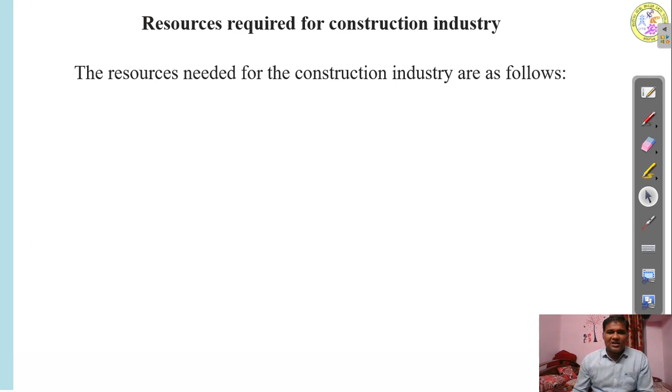Now I am going to discuss with you what are the resources that are required for construction industry, and the resources needed for the construction industry are as follows. These are the different resources.

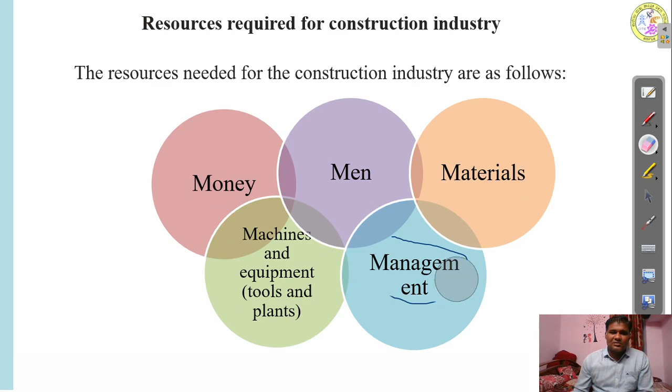Also the machines and equipment, this also plays a very important role in the construction projects. So these are the 5 important resources that are required for any construction projects or any construction industry.

Let us discuss in detail. The first one is money. Money is the first and foremost resource, where, as I told you, all the resources are dependent on this.

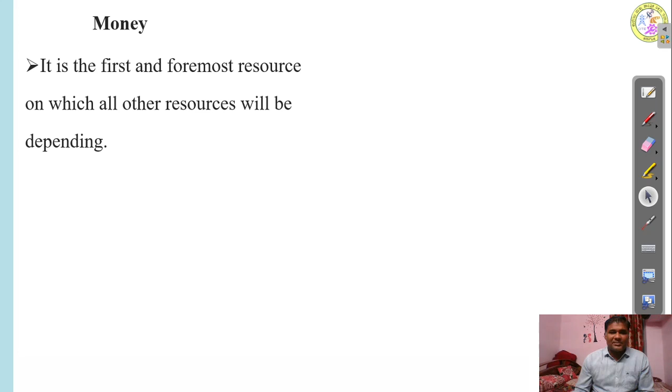This money is usually funded by the owner, but in the absence of owner, sometimes the contractor who is working in the project has to run the project with his own budget. Sometimes it happens like that. So this money plays a very important role in any construction project.

Sufficient financial arrangements should be made before starting the project.

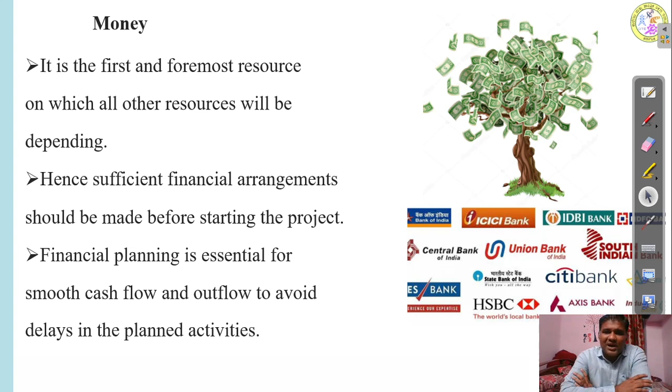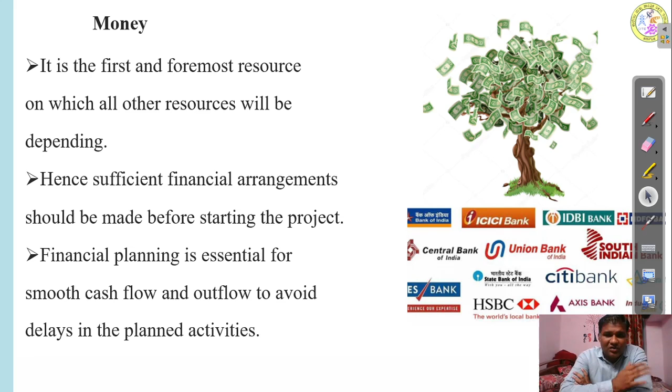So for example, here I am going to show you an Excel sheet of a project, a hotel project in Bangalore.

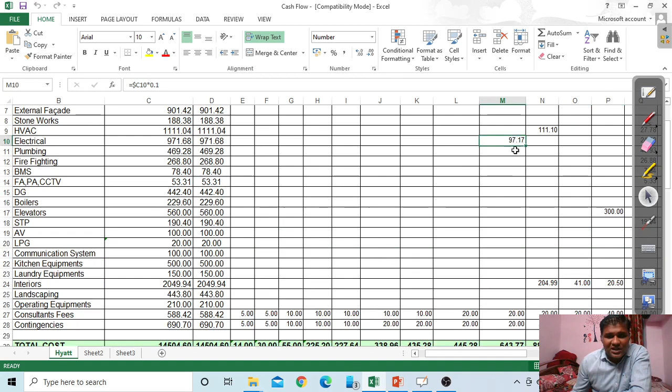So like that, I am going to propose the amount which is required for each activity and also for each specific month. This is called the budget forecast for the project.

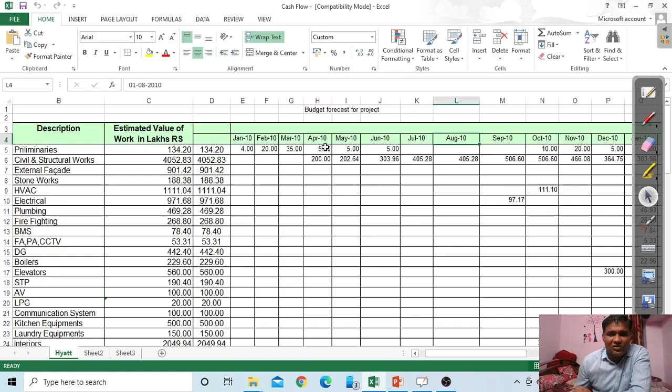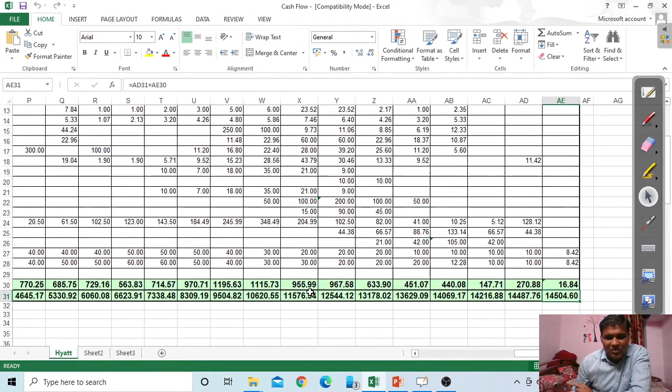See here, the total project value is 145 crore, and after allotting the amount for each and every month and activity, the total should match this - it is 145 crore rupees for the project.

So this is called budget forecasting, or the budget forecasting, and also the cash flow.

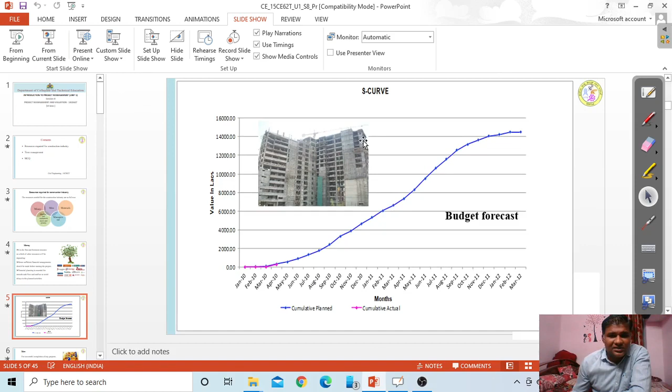Always you can see for any construction project the finance will follow an S curve.

So the investment or the budget starts at a lower level when you are putting up the structure, and as you finish, the project requirement becomes more, because there are so many agencies that are going to enter into it.

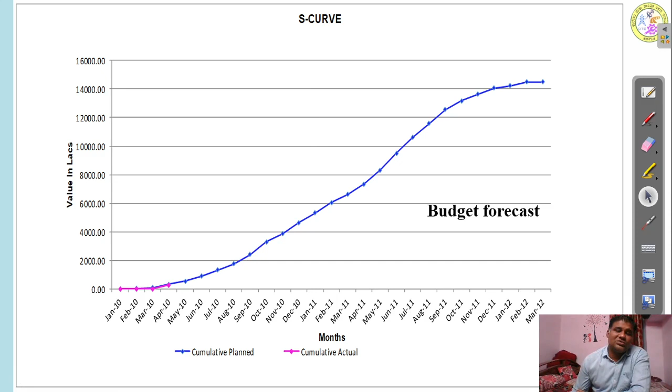So this is called as - what I'm explaining - this was the project.

This project consisted of 145 crores, and for constructing it we are spending 40 crores for only civil and structural works.

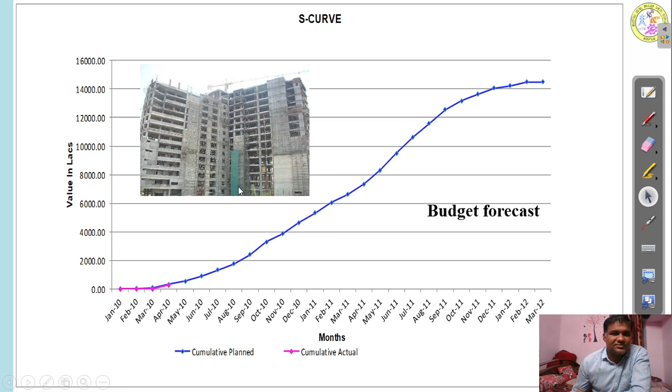So next, men - the second most important resource. Management always says the most important resource for any industry, specifically for a construction organization, is men. Men means the workers - skilled and unskilled labor, barbenders, shuttering people, and all those. This includes workers, and even the engineers also count as men.

Handling them is very important, because we have seen so many industries in history - Mysore Paper Mills, Visvesvaraya Iron and Steel Limited, BSNL - lot of companies getting locked out for so many reasons, and this may also be a good reason: manpower resource. The manpower should work hard, work dedicated, and be committed to the job. Only then can the company and industry make profit.

So for successful completion of any project, both skilled and unskilled manpower is required. When you say unskilled labor, what comes to mind is that they are not well educated, they are used for unskilled works. So here you can see the persons are excavating the soil for the casting of foundations.

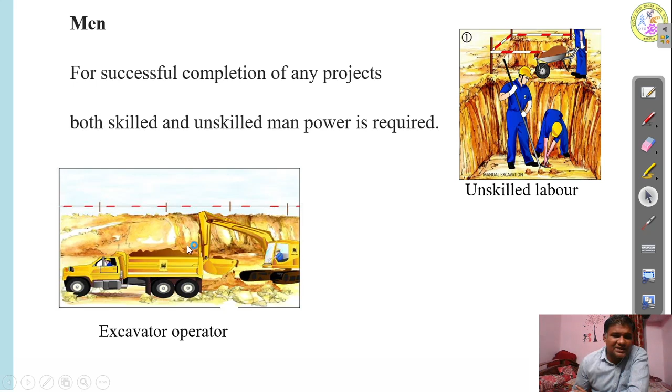This is unskilled labor, and here an excavator operator is lifting the earth to the tipper - this is also a manpower resource. And here the person is spraying anti-termite into the ground, avoiding termites catching above ground level.

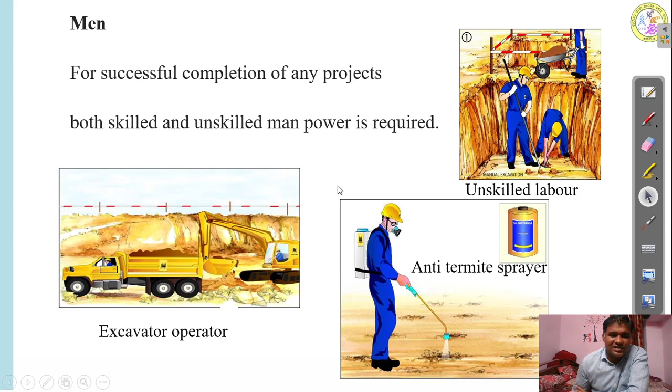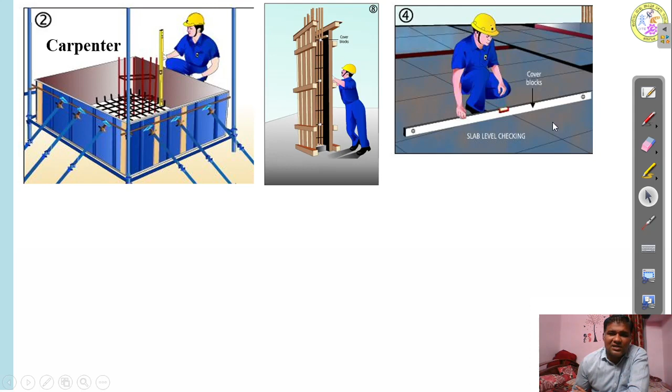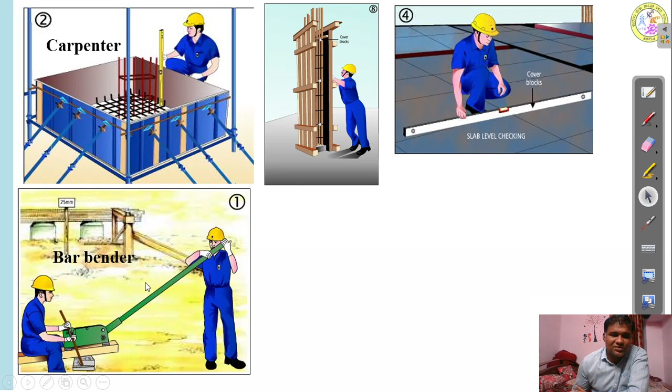Here a carpenter is setting up footing sides for centering of footing. Here the carpenter is putting the column box. Here he is checking the level of the shuttered slabs. The barbender - very important - is bending the reinforcement, making stirrups and concreting during progress of concrete.

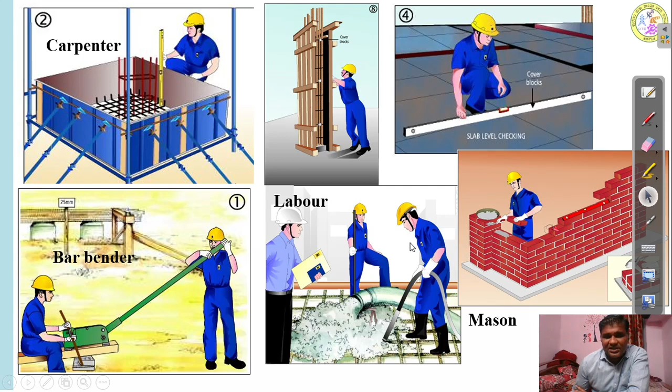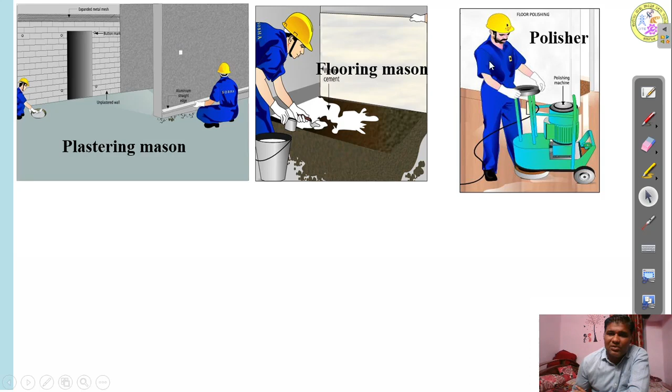So like that, what I've shown are all manpower. They enter the project at different stages. In the initial stages you will require shuttering carpenters, barbenders, and masons. After completing the structure, masonry masons will be required, then plastering, flooring, and painting agencies - different agencies, different men will be introduced into the site.

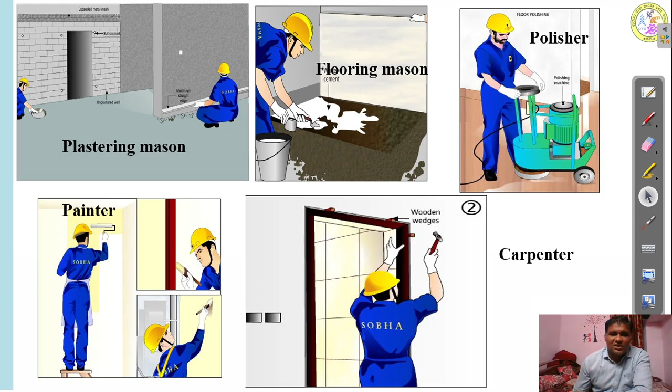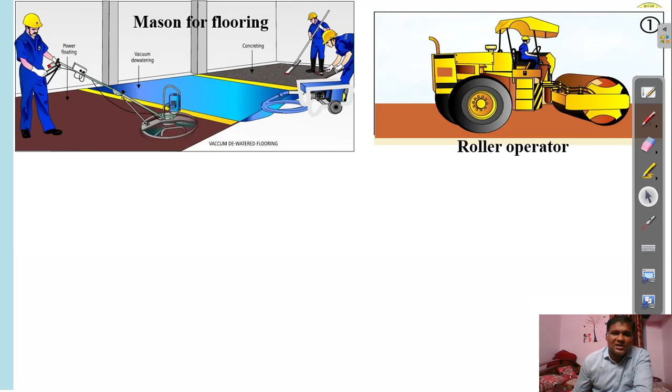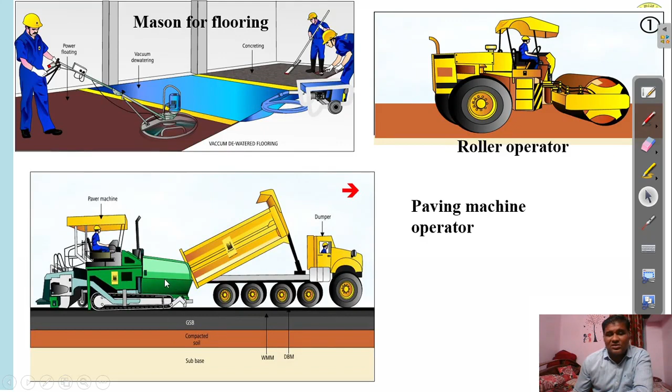Here you can see this is called vacuum dewatered flooring for parking and driveways. Here the roller is operating for compacting the earth, and a paving machine for constructing bituminous roads. So these are the different workers seen used as resources. Now men is not only limited to those workers - even the site team and consultant team also come under the men's resources.

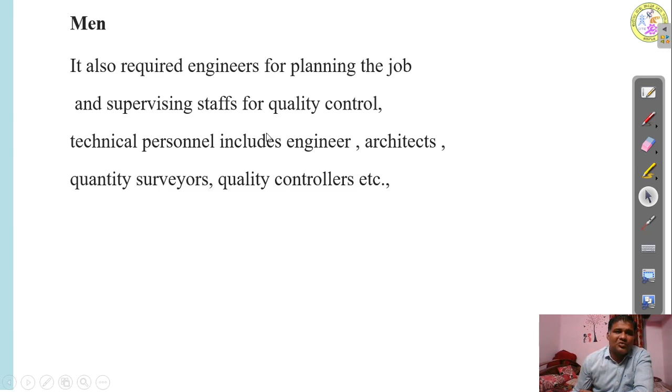For example, the supervisors, the quality control engineers, the planning engineers, the quantity surveyors. The surveyor's main job is first he will come onto the ground and he is going to hold the footing layout.

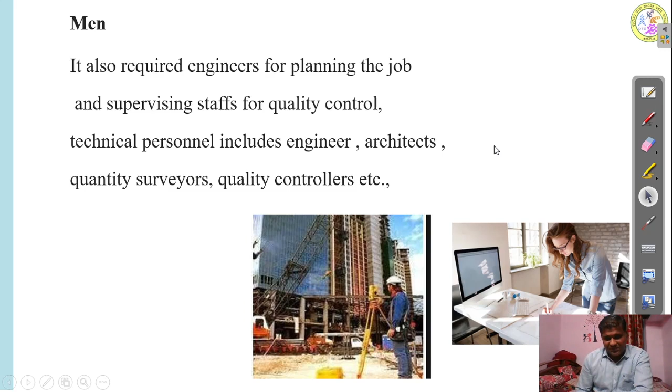And then quality control engineer - any material that is coming into the site has to be tested, and proper records has to be maintained.

Because before handing over, after everything is complete, after the total building is finished, when you are going for a handover, these reports - there will be an auditing done, and these reports will be very important for commissioning of the project. Because there are so many issues, problems have been raised up in Bangalore.

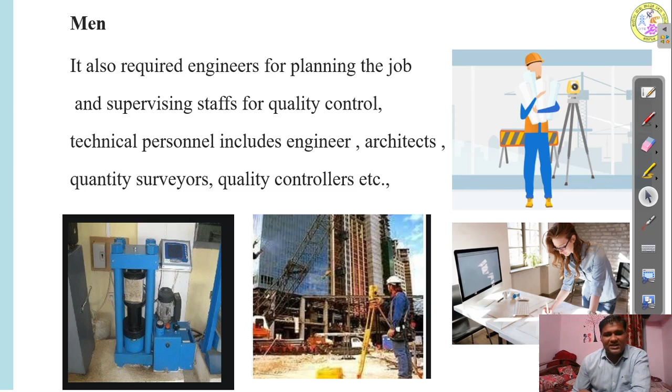So next is materials. Materials are the physical resources which provide physical shape to the designed project. For any construction work, large quantities of different materials are required, and they should be made available in time.

So now we are going to prepare a schedule. Like I showed you the cash flow, in the same manner, materials schedule will also be created. How much aggregates are required for this month? What are the different materials? What material is needed for HVAC, for plumbing, what are the different materials required?

In the schedule, every day or every month I am going to put the requirement of materials and the amount, because material schedule is created so that material has to be on site in advance, because every day there will be 250-300 people coming to the site, and you have to as an engineer show them the work. If there is no material being planned, then there will be idling of labors, which is a loss to the organization.

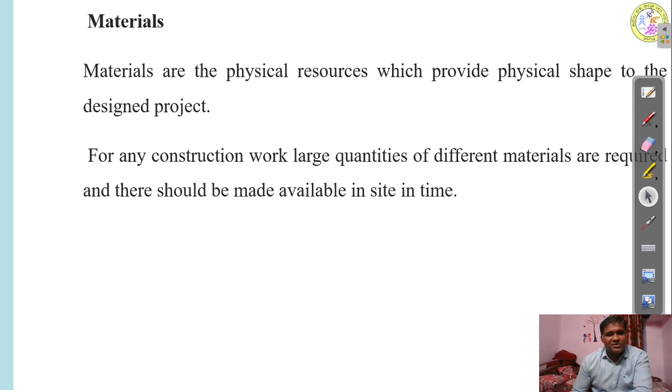So managing of materials is also very important. Usually the purchase manager will be the head of this material division. All materials should be supplied according to the required specifications. Materials such as stones, bricks, steel, cement, aggregates fall in this category.

So whatever materials are being supplied, it has to match with your specifications in the bill of quantities that was prepared. Say for example, if you are going for steel, it might be Fe 500 steel with a certain yield strength - you have to carefully observe that Fe 500 steel is on the site. Sometimes what happens is people will regularly be buying Fe 415 instead, and also the diameter of the bars may differ.

When you are going to purchase concrete from a ready mix plant, about the strength, you have to check the batching sheet at the site whether the ordered grade of concrete and the supplied grade of concrete match, because once the material is put into the structure, it is very impossible to remove it. A lot of manpower and money will be wasted if you are going for demolition. That's why while putting concrete, you have to be very careful about the grades of concrete.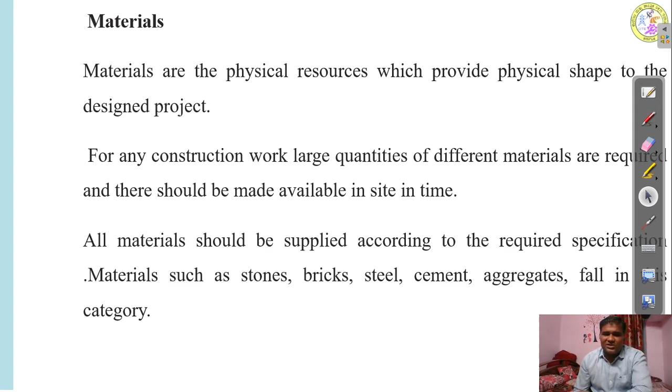So in this manner, the managing of material is very much important. And the basic materials are cement, natural sand and manufactured sand.

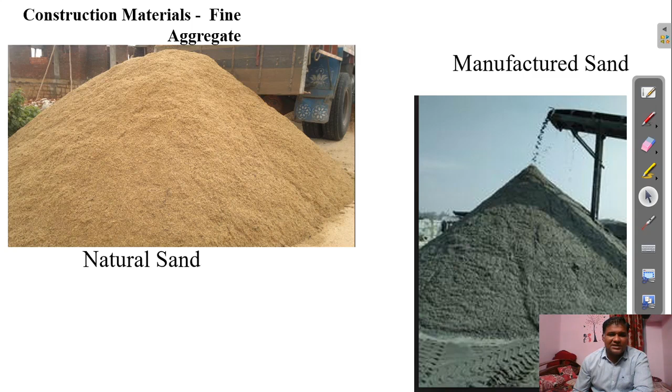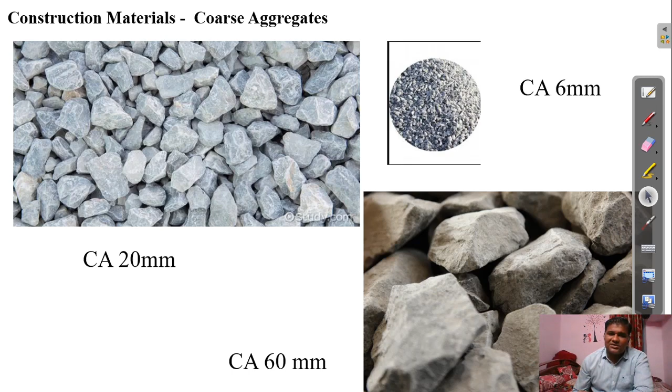Today we are in a very very scarce situation of natural fine aggregate, and it has been completely replaced with manufactured sand. Coarse aggregates for production of concrete come in different sizes - starting with 60mm for railways, 40mm for plain cement concrete and bed concrete, and 20mm and 10mm for slabs. Nowadays there is no concrete being produced without it, because if you are going to purchase concrete from ready mix plants, they are going to supply it this way.

It may take 20-25 minutes to reach your site, because the setting time of concrete is 30 minutes. So in order to delay the setting time, I am going to put admixtures like super plasticizer and retarder, for increasing the setting time of the concrete.

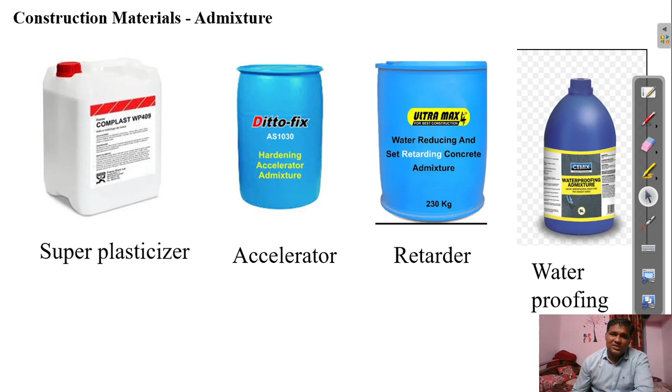Also, if you are going to construct high-rise structures, you want your concrete to be pumped through a pipeline, so it has to be flowable like a liquid, and at the same time you require higher strength. The slump should be high, almost a collapsible slump, and at the same time strength should be maintained. In that situation, these materials are going to induce those properties very well.

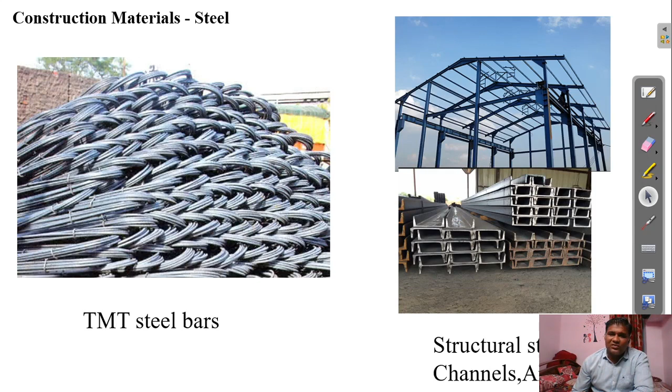Steel: there are two types, TMT steel bars for reinforcement concrete, and structural steel for when you're going for industrial structures or any sheet roofing.

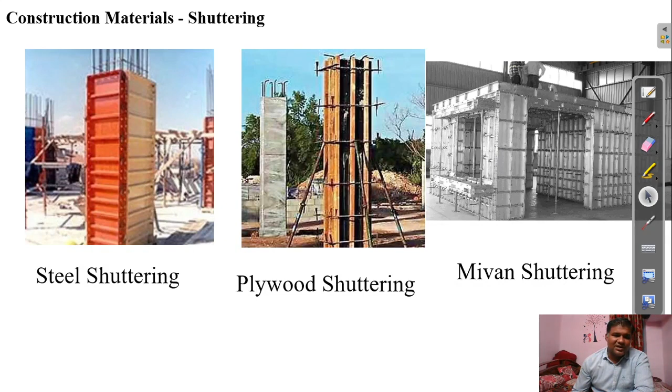Shuttering, plywood shuttering. Earlier days we were using steel shuttering, but it has been replaced with plywood. Now there is a new kind of shuttering called Mivan shuttering, which is being used.

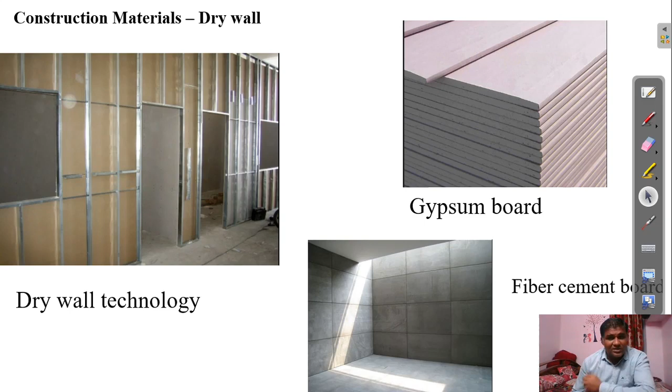And if you are not going for walls for partitions, there is one modern method of construction called drywall technology, where you drive the aluminum framework from slab to the floor, then fix it up with boards. The boards may be of different types: fiber boards, gypsum boards, and acoustic materials for absorbing sound if it is being used in cinema theaters or shopping malls.

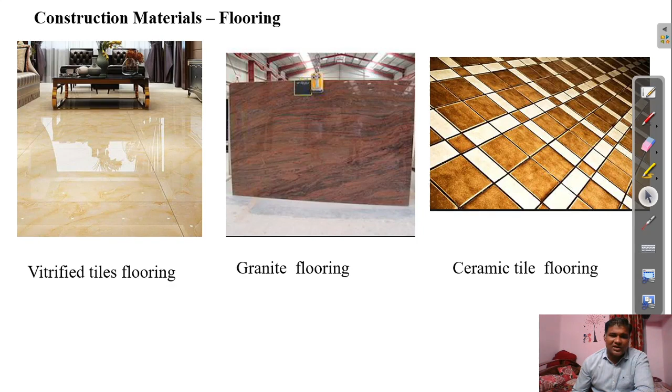Wall panels, flooring material variations are very very large: vitrified tile flooring, granite flooring, ceramic tile flooring, and construction materials like wooden flooring, polyvinyl flooring. So there are plenty of flooring materials also.

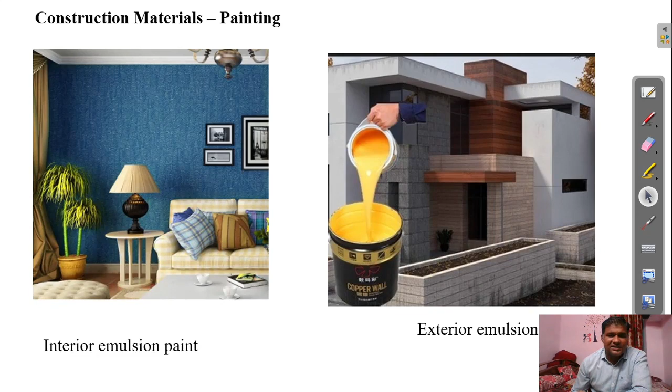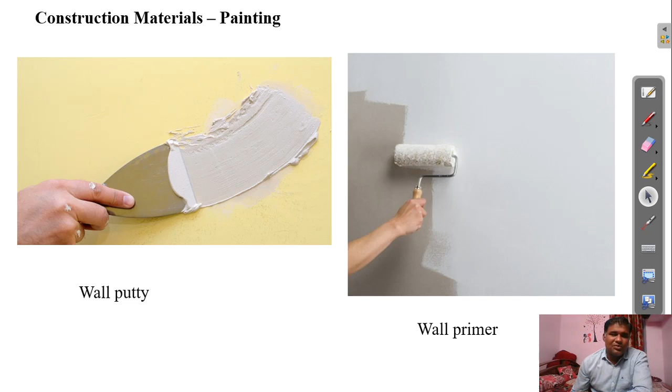Construction materials such as painting: interior emulsion paint and exterior emulsion paint, wall putty, wall primer. So when you're going for painting, first a coat of primer will be applied, then putty will be applied, and then paint is applied.

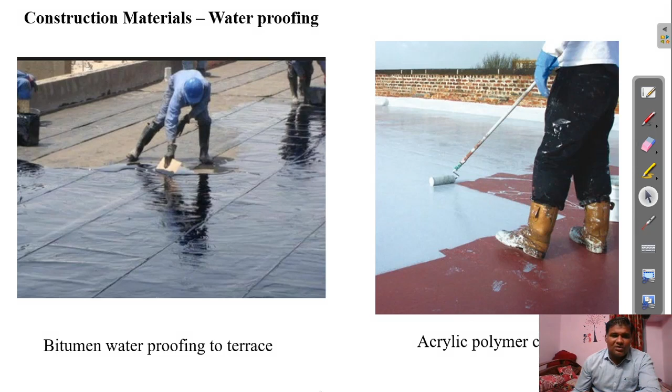Above this, one layer of concrete is put and finished. Again, one more layer of acrylic based emulsion is applied. So these modern materials are also required.

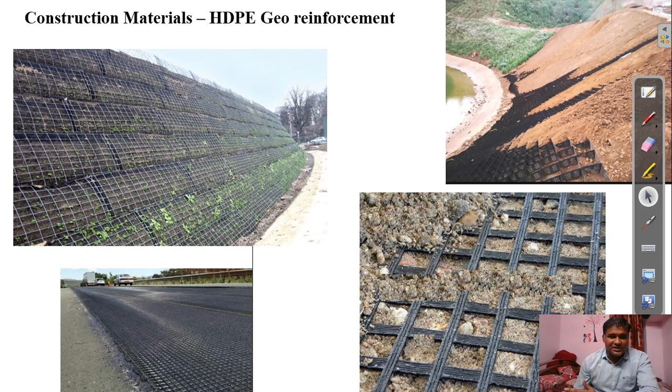These are the different materials that have to be used in the construction industry, which you have studied thoroughly in your third semester in construction technology. So I'm not going to stress more about the properties of materials and all, I just wanted to revise the materials being used in the construction industry.

Now, after men, materials and money, then comes the management of tools and plants. Tools and plants means majorly the equipments nowadays. It's an automation world where manpower has been strictly reduced, because of human errors.

The robotics and the machines are going to take the place of humans. So in the construction industry also, a lot of modern equipments have come to improve the progress of the project, and to ease the human effort.

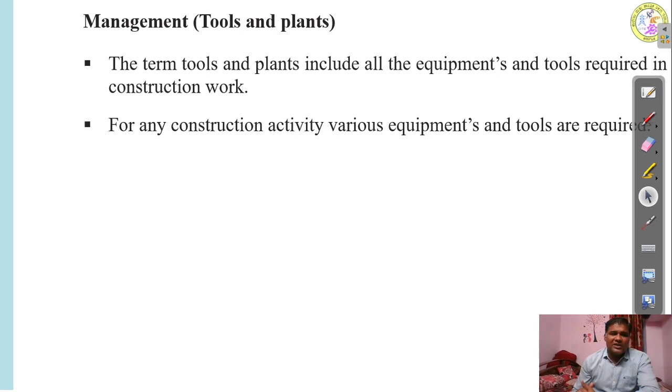So for any construction activity, various equipments and tools are required based on the activity, depending on the type and nature of the work, and which type of project—whether it is a road project, building project, or dam construction project. Based on that, you are going to have a set of equipments.

If you are going for buildings, high-rise structures or any kind of buildings, you need earthwork excavators at the initial stage of excavation. If you encounter any rock, then you go for blasting or compressors, rock drillers. And if you are going for superstructure, you need equipment for lifting concrete, pipeline and pumping setup.

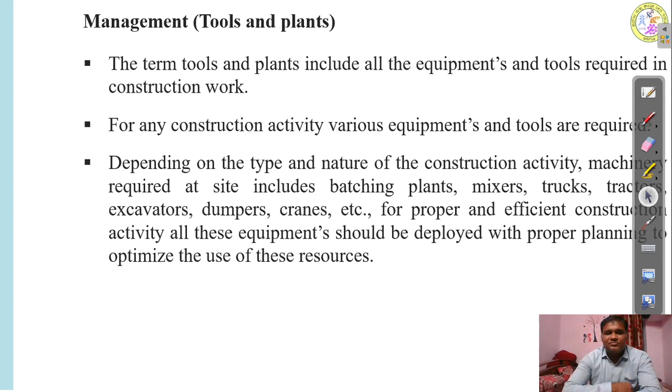These are the basic, and you also need a tower crane for lifting the materials. Coming to road projects, there is a different set of equipments required: graders, earthwork excavators, paving machines, and rollers. So let us have a look at the different equipments.

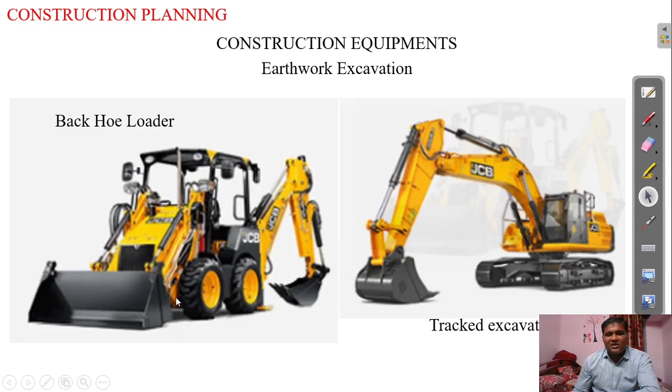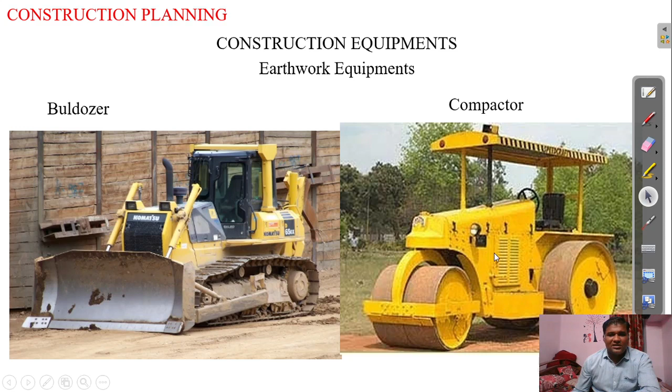Next is the bulldozer. Whenever there is construction of any project, first you have to remove the plants, so that will be done by this bulldozer. And then for increasing the density of the soil, you have to compact it. So this is the road roller, usually called as compactor.

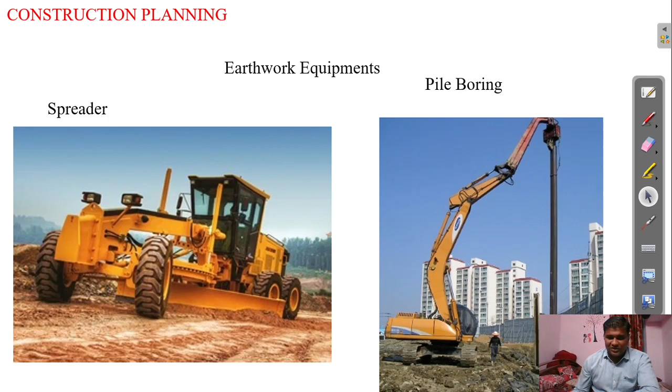When you're going to prepare an embankment, a lot of earth has to be spread, so for that purpose we use this spreader. And in the construction of bridges or high-rise skyscrapers, we go for pile foundation. Even for Bangalore Metro, for the piers construction we used pile foundation. So this is the pile boring machine that is used to dig the holes.

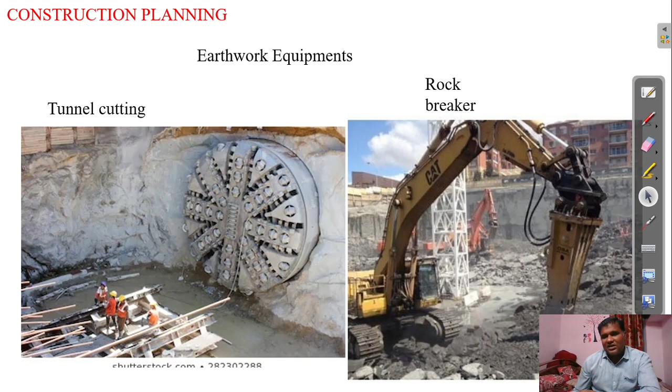If you go to the northeastern states of India, where hills have been cut to prepare tunnels, the tunnel cutting machine will be used. And if you encounter any rock as you go deeper, because for high skyscrapers you need 2 or 3 level basements for parking in metro cities, the depth of excavation will be more. So there, for breaking the rock, we use this machine.

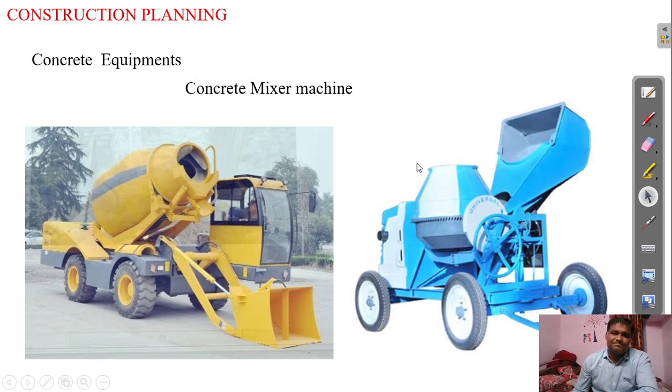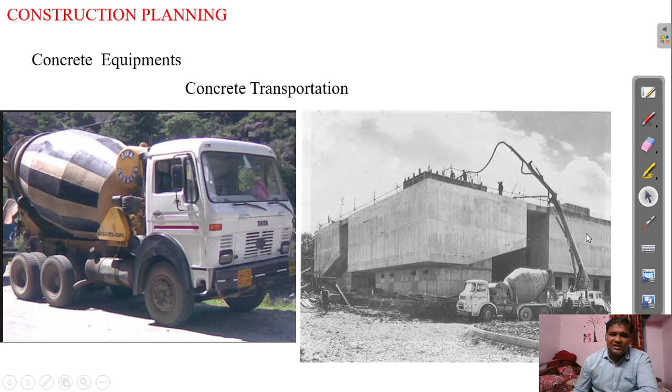And this is boom pressure concreting. When there is difficulty in reaching, in putting the pipeline, this boom pressure concreting will be done.

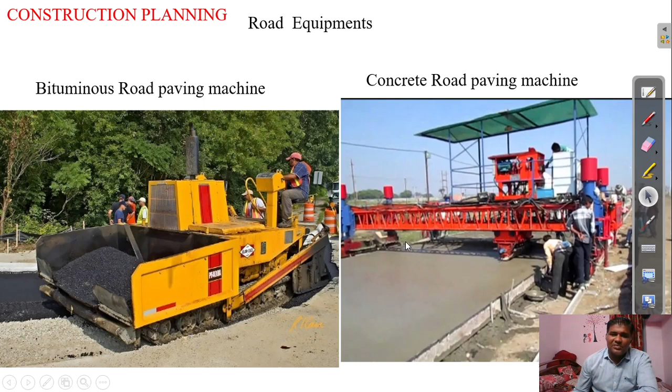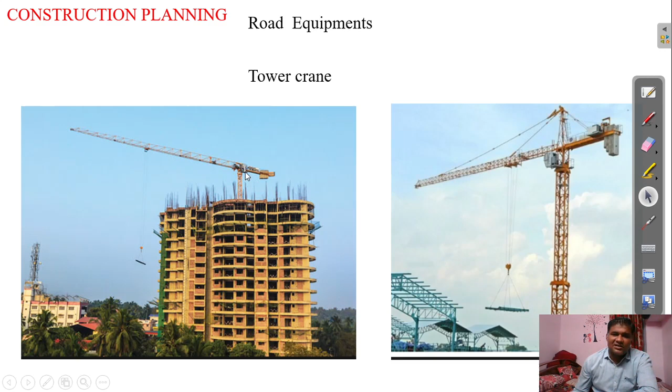And while constructing towers, this will help a lot. This is called the tower crane, for lifting any type of material. It may be steel or concrete or shuttering material or blocks. This tower crane will be used, and it can be extended as per the progress of the structure.

So these are the different machineries that have to be managed well, because their maintenance is required and their safety is also important. The machinery management is also a very important resource for the faster execution of projects, and its planning is also very important.

And finally, one more type of important resource is manpower, because we have plenty of people at the site: site engineers, quality engineers, laborers, unskilled laborers, bar benders. A proper plan also will be there, but in order to execute it, there should be good coordination between the people. There should be a good organized way of working, and how to control and coordinate them becomes a very important thing.

So for that, there will be a management team, called managers. If construction productivity has to be increased, all its activities should be more efficient through improved designs, construction methodology, manpower planning, manpower training, better tools and equipment, and ultimately better management of these factors.

I can share my experience: when we were constructing a tower, at the top we had to construct an RCC tank. But the contractor removed the material hoist, and lifting of concrete was not at all possible. So they put manual labor for taking the materials, that is aggregate, cement and all. It was involving a lot of time and money.

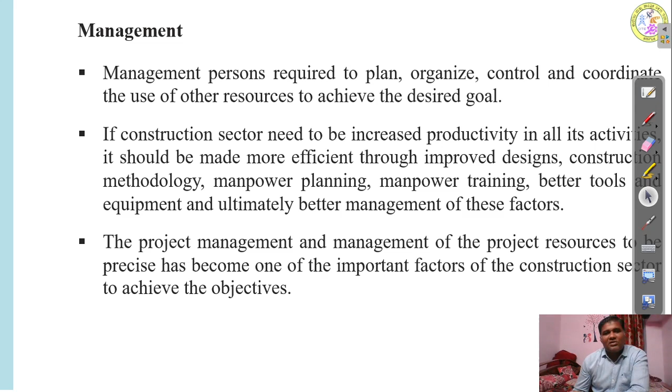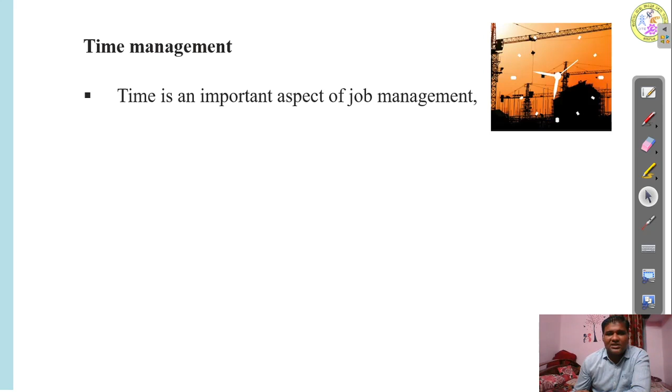Now coming to time management, we were speaking from the first session that time is directly proportional to money. Any project has got its own time of completion and it has to be finished by that. A construction project has to proceed efficiently and be completed within contract time, because in government projects, and also in private projects, a penalty will be levied onto the contractor who does not finish it in time, at the order of 1% or 2%.

So the time must be carefully planned and scheduled in advance, because finishing the project in time actually gives a large number of feathers on the cap of the contractor. There has to be practical planning, and the planning should be done by very senior engineers who have a lot of experience.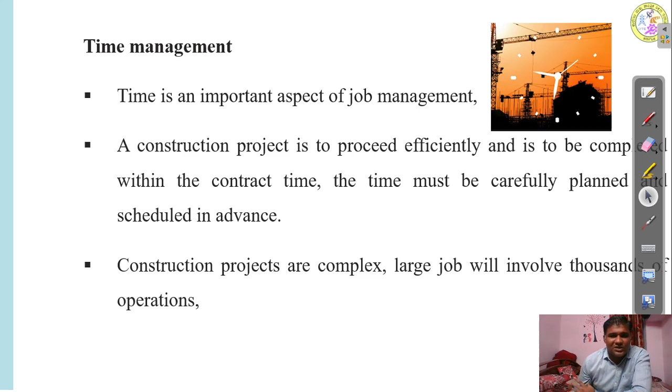Different types of projects and different types of activities involve different durations based on the availability of manpower, machinery, and site conditions. So complex construction projects are a little complex. A large job will involve a lot of activities, thousands of operations, so managing them is a very great task.

Each task performed on the project has its own requirements. As I told you, if you are going for any earthwork, it has its own requirement of machinery and time. If the climate is not good, if there is rain, it is difficult to work. And if the water table is high, the water is going to come out, then working is not possible, so the duration may exceed.

Each task has its own requirement, and also requires specific materials, equipment, and labor, which together determine its duration. There are chances that there is more labor and less equipment, or more equipment and less labor, that are not balanced, so this duration will be determined.

Before going for execution of any project, the project time will be planned beforehand. While planning, for each and every activity the duration will be fixed. For example, for a plastering job I am going to fix 50 days. This 50 days will be fixed based on the availability of labor, scaffolding - called equipment - and availability of materials like sand and cement.

So the start depends on the completion of certain preceding operations. Each and every activity is dependent on the finishing of the previous activity. For example, you can do the plastering only if the block masonry or brick masonry is completed. If the block masonry or brick masonry is delayed, plastering will also be delayed.

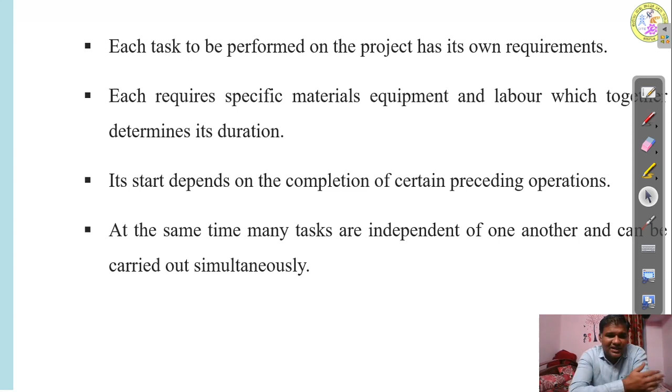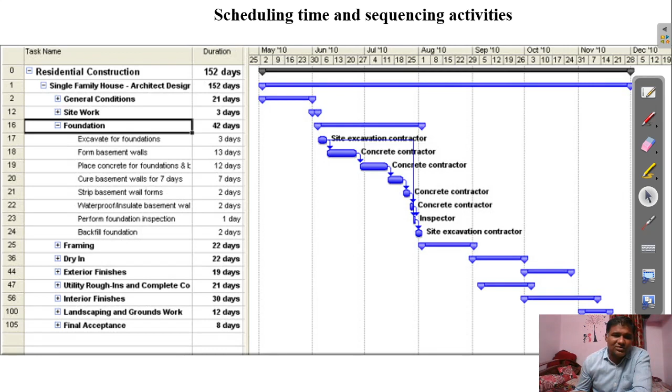This is called managing of time, scheduling of time using a software called Microsoft Project. In Excel sheet also you can do this. So this is all about time management, and so these are the different concepts I wanted to explain to you about the resources in construction industry.

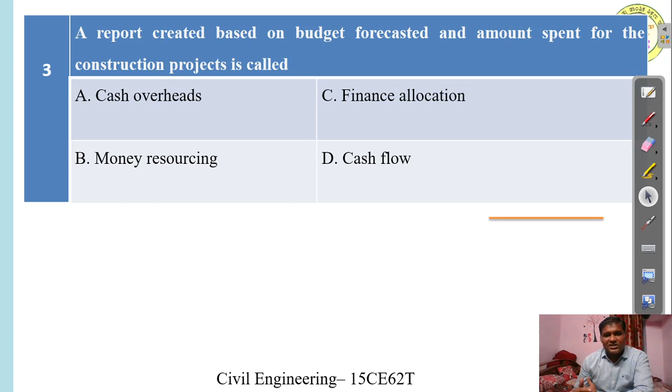A report created based on the budget forecasted and the amount spent for the construction project is called option A cash overheads, option B money resourcing, option C finance allocation, and option D cash flow. The right answer is option D cash flow. That means whatever we forecasted, below that we insert a row for how much is actually spent. So there has to be matching between the amount forecasted and spent. That report is called as cash flow.

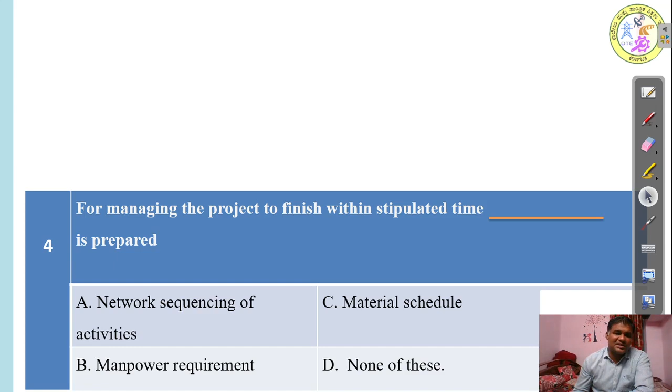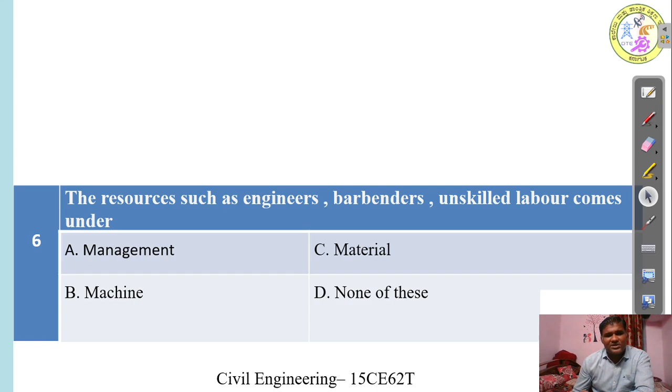The resources such as engineers, barbenders, unskilled labor comes under option A, management, option B, machines, option C, material, and option D, none of these. So the right answer is option D, none of this, because all those resources comes under men. The managers are going to come under management.

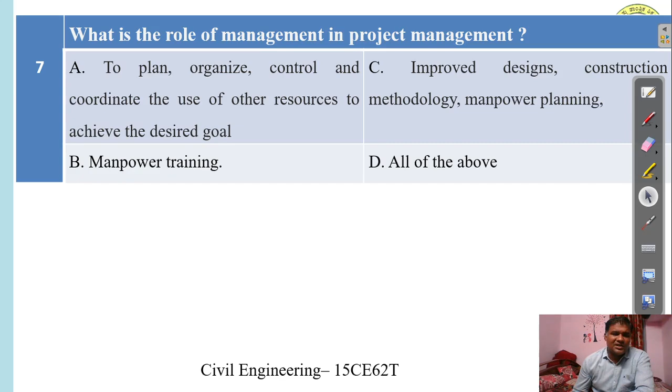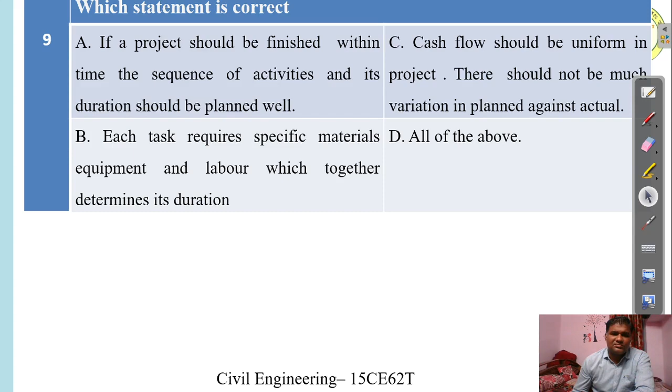Which statement is correct? If a project should be finished within time, the sequencing of activities should be planned well. The cash flow should be uniform in the project. There should not be much variation in planned against actual. Option B, each task requires specific materials, equipment, and labor which together determines its duration. And option D, all of the above. All the statements are correct, so option D is the right answer.